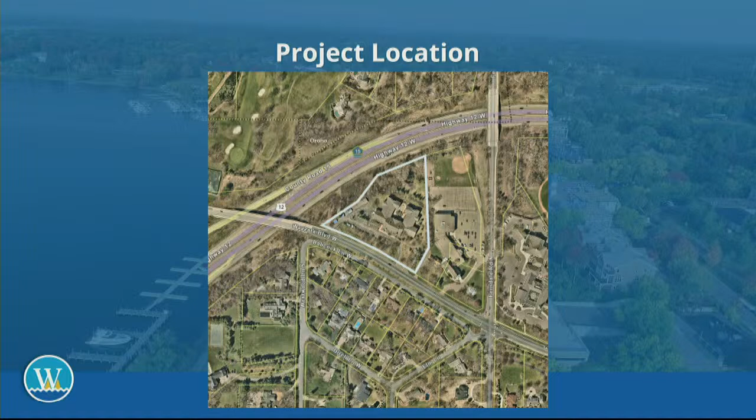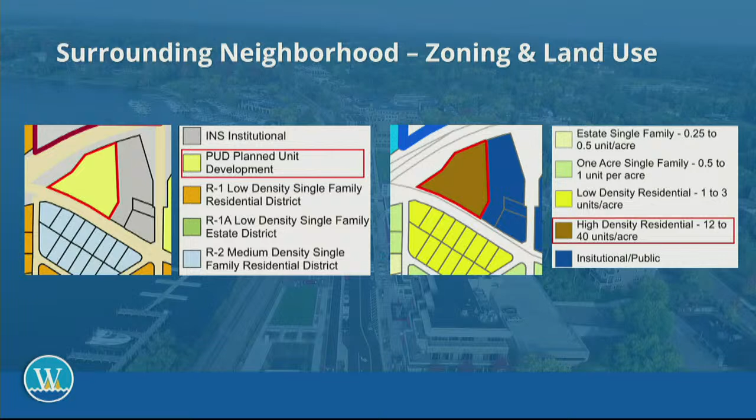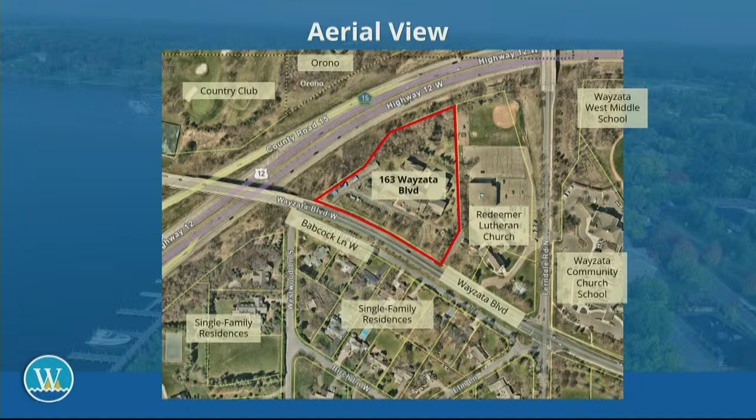Perfect, thank you. The owner of the property is TMSC of Wayzata LLC, and the applicant is Jeff Schuler, present this evening. The project is located on Wayzata Boulevard West. It is east of Highway 12 and west of Ferndale Road. The property is currently zoned planned unit development, and it is guided high-density residential. Here's an aerial view of the property. You can see that it is located near Highway 12 with the Country Club and the City of Orono located to the west, Redeemer Lutheran Church and Wayzata Community Church located to the east, as well as the middle school, and single-family residences located to the south. Here's a street view of the property looking north from Wayzata Boulevard.

There are several requests this evening that we will review. The first is the comprehensive plan amendment from high-density residential to the institutional and public land use designation. I would suggest that when we get into the discussion of this application, we begin with that request first and work through them in this order here. The next is a zoning map amendment, which is also commonly called a rezoning, from planned unit development to institutional. The third request is a conditional use permit for elderly care facility use in the institutional zoning district. The fourth is a variance to the side yard setback, which we will detail here in a moment, and then several design standard deviations, which we will also provide detail on for you this evening. I'll turn it over to Eric Swaber to describe the project in detail, and then I'll summarize at the end.

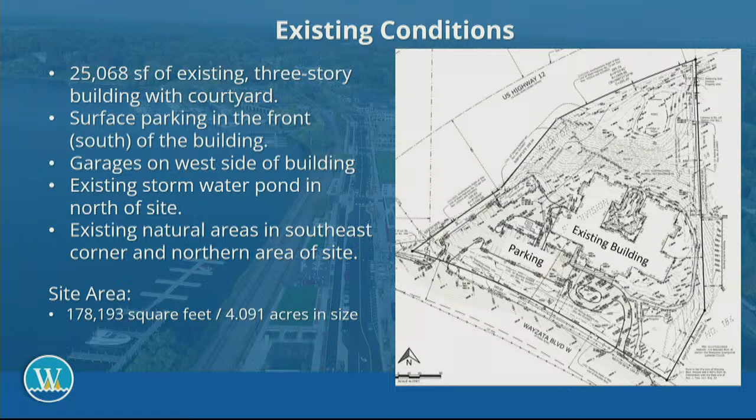Existing condition, this square footage is the footprint. There's a roughly 25,000 square foot footprint, 3-story building with a courtyard in the middle. Surface parking in the front or south of the building. Garages on the west side of the property, and the stormwater pond located on the north. Existing natural areas exist in the southeast and northern areas of the site. The site is just over 4 acres in size.

Back in 2021, this same applicant came and received an approval from the city. There were 2 elements to that approval. It was a PUD amendment to that Meridian Manor PUD that would allow the renovation of the 3-story senior living and memory care facility to allow up to 84 dwelling units. And there was the design standard deviation to allow for parking in front of the building.

Following that approval, the applicant attempted to work with the Minnesota Department of Health to get that renovation permitted, but the Department of Health, due to the changes in regulations, would not issue a building permit. So that's how we got to where we are today of the submittal for a new building. Here is the site plan. We'll go into more detail, but in general, parking in the front and in the back to the northwest, an outdoor recreation area to the northeast, and then a linear building in the middle of the site.

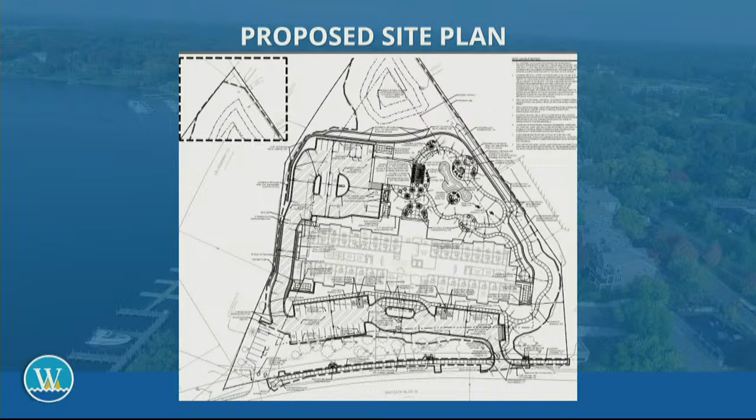This is a little bit more detail on the site plan. In brown, that is the new 2-story, roughly 31,000 square foot building. Would have 80 elderly care facility units. Has 62 parking stalls, both in the front and rear for staff and visitors. The green area indicates the patio and garden recreational area. And then the area in purple there is an accessory building that would include outdoor kitchen, a cabana, and then storage, including the trash storage containers. And that's all enclosed.

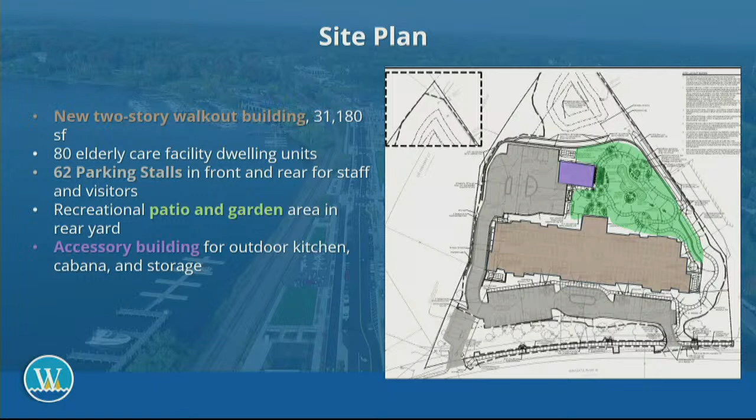Setbacks. We're trying to show through the colors which are the setbacks, but the north setback, that's the middle diagram in red with the red line, that's over 200 feet. The south setback, which is on the right-hand side, that's 85 feet. The east setback is 50 feet and the west setback is 30 feet. You will note that for the institutional zoning district, the standards for all of those yards is a 50-foot setback, so they are requesting that variance to the west side setback to be down to 30 feet.

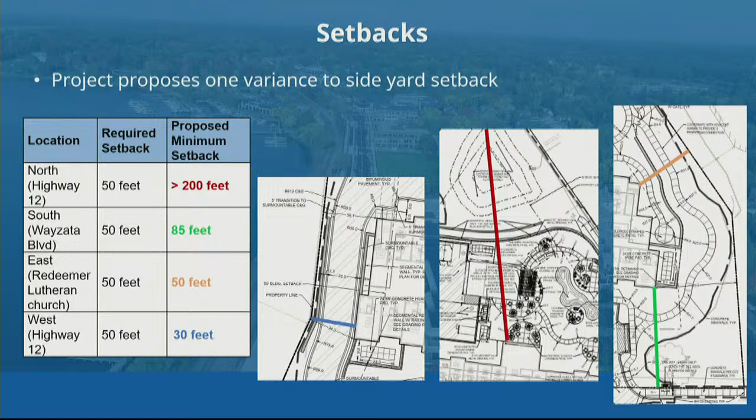Building height, the maximum heights allowed in the institutional district is 3 stories or 40 feet. So note that is different than the PUD or a number of the commercial districts that we've worked in. It is 3 stories or 40 feet. The proposed building is 2 stories and 39 feet, 11 inches.

This is again getting to the residential units and unit sizes. Meridian Manor had 75 units. Moments of Wayzata is proposing 80. The code, which again we changed back in 2022, says assisted living or memory care dwellings can have 330 square feet for units without kitchen facilities. All of their units do not have kitchen facilities, and their units range from 402 to 580 square feet in size. So they meet the requirement that we added for assisted living and memory care dwelling units.

The outdoor recreation space, one of the 4 standards for the conditional use of elderly care facilities in institutional, is that recreational space is located in the rear yard. So you see there, the northeast portion of the site is over 10,000 square feet of garden, patio, and pathways. That is secured, so you have to get there from inside the building.

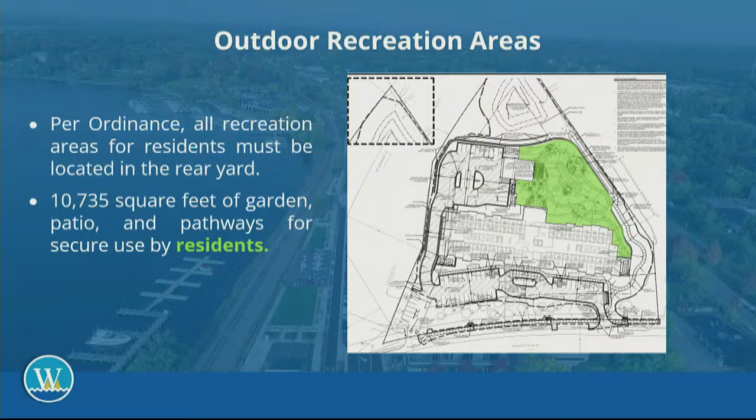The conditional use permit: they are proposing to rezone this property to institutional. Elderly care facilities, which includes assisted living and memory care, is only allowed within the city as a conditional use within the institutional zoning district. So that's the request for rezoning to institutional.

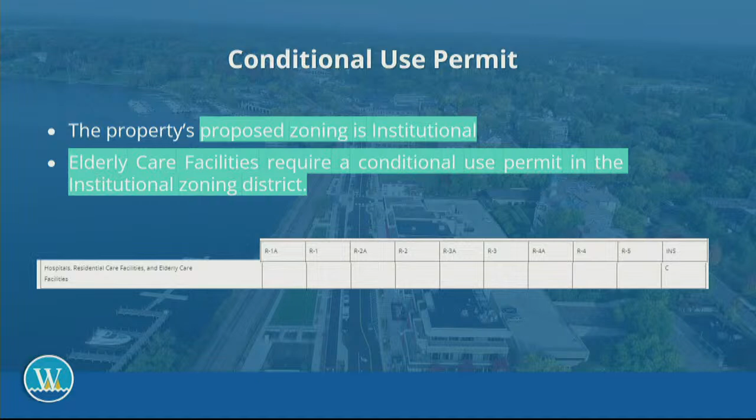The variance to the side yard setback, again, on the west side or on all sides, the code requirement for the side yard setback is 50 feet. They are proposing 30 feet on the west side. And in their narrative, they stated they're asking for that reduction because it's adjacent to Highway 12 and isn't impacting any immediate neighbors.

So going into the design standard deviations, they are requesting to allow part of their parking to be located in the front yard. Again, the CUP standards for elderly care facilities require recreational areas in the rear yard, so placing all of the parking in the rear yard would really limit that outdoor recreational area. Again, the deviation is required to allow parking in the front yard. I will note that there are actually 2 sections of the design standard that have the same requirement of prohibiting front yard parking, so it's 2 sections of the code that are being deviated from, even though they both have the same requirement.

Second design standard is building recesses. To start with, the code requires in all design standard districts that each building recess be at least 250 square feet in area and at least 8 feet in depth. So area 1 and area 4 happen to be 251 square feet in size, so they just are over that minimum recess area. And then areas 2 and 3 are about 440 square feet in area.

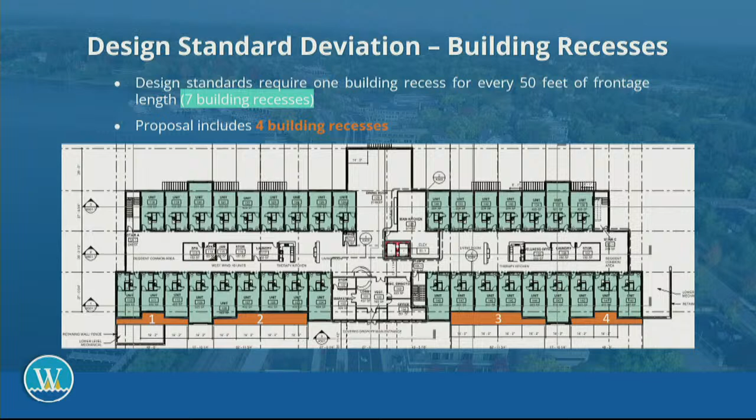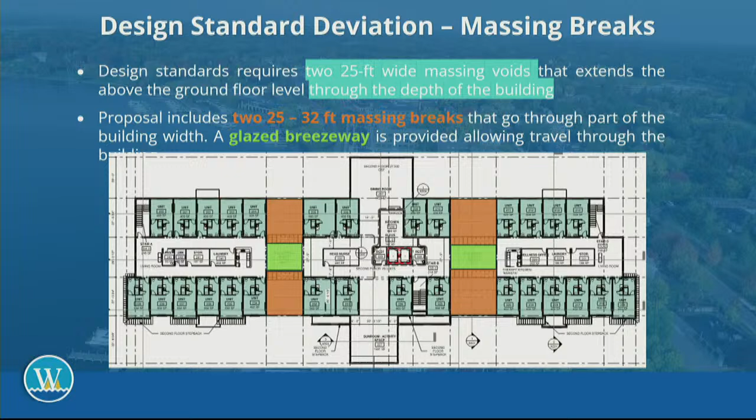The next design deviation is massing breaks. For this location, there should be a massing break that is 25 feet wide for the second story or above. So there isn't a required massing break on the first story, but for the second story and above, for every 150 feet in facade. This facade is over 300 feet, not yet 400 feet, so that would require 2 massing breaks. The way they are proposing to achieve it is they want to maintain a transparent pedestrian walkway between essentially the 3, for lack of a better word, towers of that second floor to maintain the access for the residents. The area in orange shows where there is no building, and the area in green are those glazed breezeways that are simply the hallway to connect those 3 towers.

Then there is a design deviation for unit entries. The design standard is for residential units on the ground level to have a secondary exterior entry. The proposal does not include those entries. And the reason the applicant stated is if they were included, those entries would remain permanently locked due to the safety needs of the proposed residents.

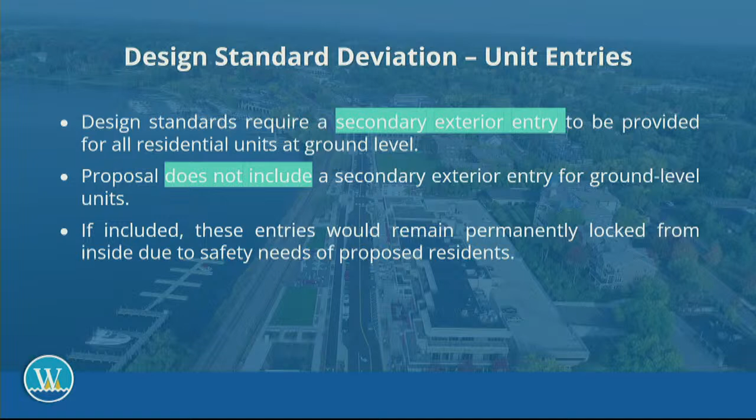The next variance is screening of sheet roofing. What this means is if you have a flat roof, the code requirement is to have a 3-foot parapet around that flat roof. They are only proposing this in one location, the location in green, basically between the numbers 8 and 9. So that's the area of the breezeway. They're trying to keep that breezeway as short as possible to keep that effect, the intent to keep the visual ability to see through those 3 separate towers of that second floor.

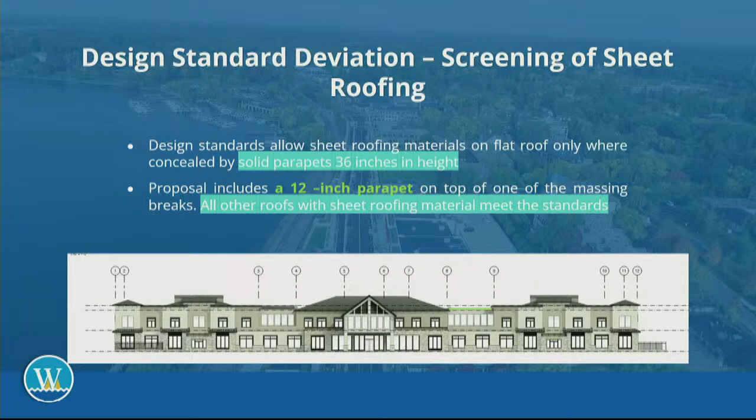So a couple other standards that we need to discuss that are code requirements are lot coverage and floor area ratio.

The maximum for institutional zoning of lot coverage is 40%. They are proposing 19.8. The comprehensive plan states that the maximum floor area ratio, that's what the FAR stands for, the maximum floor area ratio is 1, and their proposal is 0.5.

So they are proposing those retaining walls to allow for that parking area and that outdoor recreation area that is currently a steep slope. I will state, this is not in the shoreline district, so we don't need to observe bluff or steep slope regulations that we would in the shoreline district.

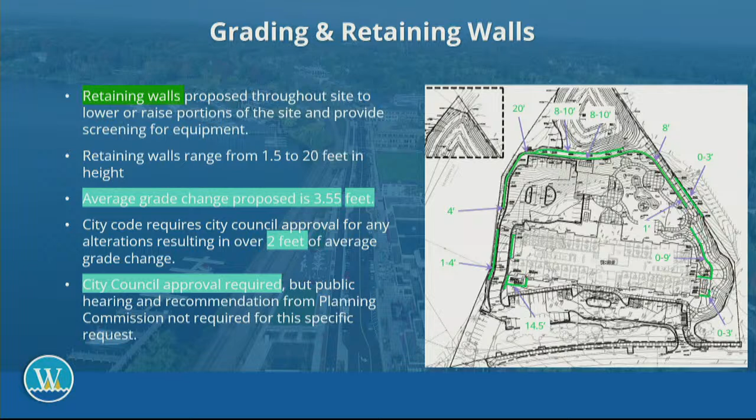Due to this and the building excavation, they are actually proposing to change the average grade 3.55 feet. The city code requires city council approval for any alteration that results in more than 2 feet of average grade change. We wanted to point that out, but state that that in the city code is for the city council, so we don't need to have a planning commission recommendation on that. More than 2 feet of average grade change.

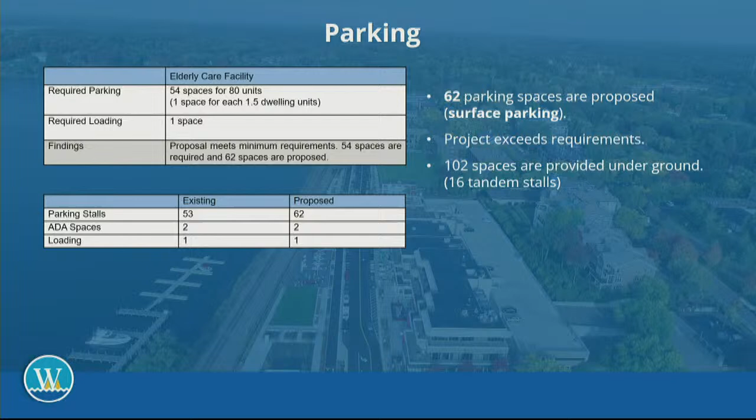So parking, the required parking would be 54 parking spaces for the 80 units. They are proposing 62. They are also providing all the ADA and loading spaces that are required as well.

Tree preservation, there is currently 774 inches of trees. DBH is diameter at breast height. We'll just call it diameter from here, but 774 diameter inches exist. They're removing 356. All the removals are significant trees. There is no heritage tree removal being proposed.

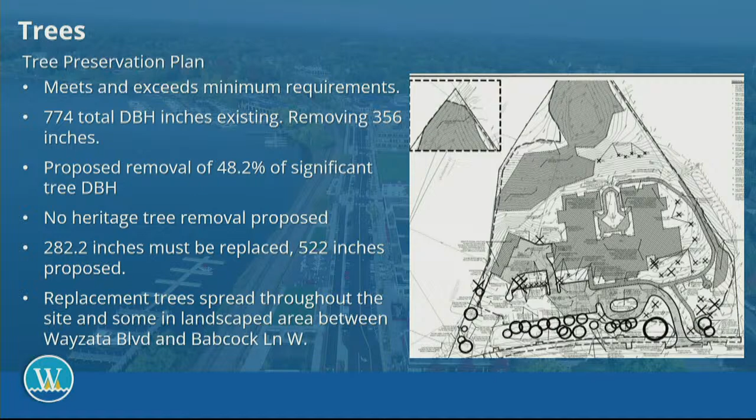And so the code standard is that 282.2 inches of replacement is required, and the applicant is proposing to install 522 inches of new trees. So not quite double, but pretty close to double the code requirement. Replacement trees will be spread throughout the site, and some are proposed in the landscaped area on the south side of Wayzata Boulevard between Wayzata Boulevard and Babcock Lane West.

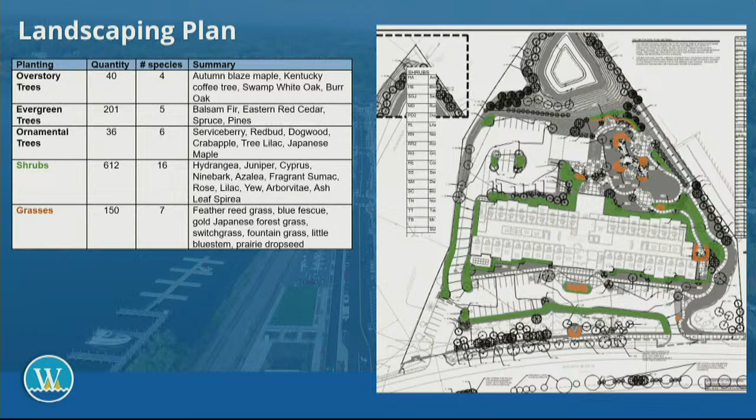There is also, in addition to the trees that we discussed, additional landscaping of shrubs, which are generally shown in green, and then some other grasses, which are shown in orange. So in addition to just the trees, they are planning an extensive landscape to the site as well. And at this point, I will turn it back over to Community Development Director Gellner.

Thank you. So notification of the comprehensive plan amendment was sent to the City of Orono and the City of Plymouth on April 2nd, 2024. We did not receive any concerns from either city. This hearing was published in the Sun Sailor on April 11th, and then a notice was sent to property owners and renters within 500 feet of the property as well.

The neighborhood meeting was on February 5th, and there were 15 people in attendance. Topics of discussion included headlight glare concerns, concerns about the east property line and improvements being made in that area in coordination with the church to the east. There was discussion of the site entry and exit points, the parking configuration, the design deviations, and the site lighting.

One letter has been received from a group of neighbors to the south. The neighbors note concerns in their letter that include tree preservation, light pollution, the architectural design, the number of design deviations, and the property condition since 2021.

Just wanted to acknowledge here that in 2023, there were property maintenance violations for this property. They were addressed by the property owner. They included long grass and weeds, storage of concrete barriers, construction trailers, storage containers, and construction equipment, as well as excessive animal waste on the property. And all those items have been addressed through a separate process from the process that we are addressing here tonight.

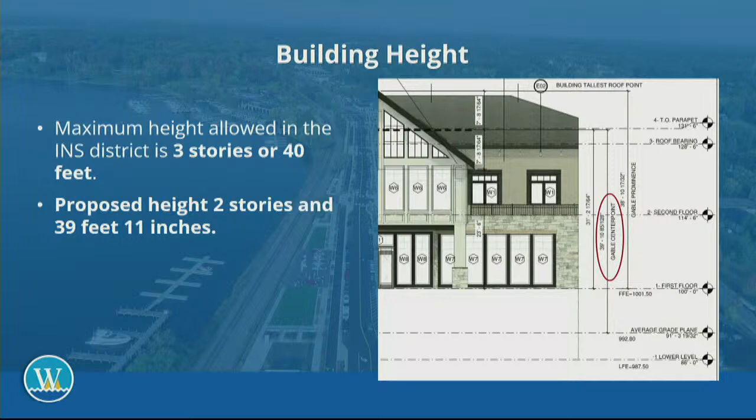Yeah, so looking at the building from the front, from Wayzata Boulevard, it looks like it's 2 stories. Yes. But then from the back, it's 3? That's correct. It's like a walkout. So the city code says that any lower level that has an exposed foundation of at least 6 feet for more than 50% of the foundation then counts as a story. Okay. This is less than 50%.

So that's why it's not a story by our code, but if you were looking from the north, which really only people from the building would, you would see the lower level and the upper level. So there's basically 3 levels in the building. There are 3 levels, but by code, only 2 stories.

Got it, okay. And maybe the applicant can speak to this, but I'm curious about the tree plan for the front of the building along both Wayzata Boulevard and Babcock Lane. Does that mean they're going to take trees across the street in that buffer between the two? They're not removing any trees. Planning on adding? They're installing trees in that buffer. Okay. And do you know where? Yes, I can tell you what page in the packet in 1 second.

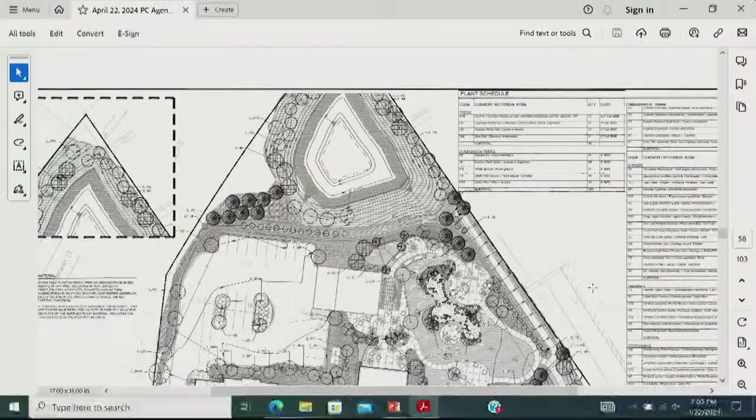It is on page 58 of the packet. The plan sheet is L 1.0, and then if we go to the very south, where you get across Wayzata Boulevard. Okay, there it is. You see there, they took a look at where the existing trees are and are proposing to install new trees essentially in those gaps. Okay, thank you. I believe you had a parking lot configuration question as well. Looks like this is answered, yes. Okay, thank you.

So Chair, I think while the applicant is doing their presentation, we can look up those grading elevation numbers. Okay, thank you. At this time, I'd like to invite the applicant to come forward and address the commission. Please state your name and address for the record and your role if you're an advisor or other part of the applicant's team. And if you can kindly keep your presentation to 10 minutes or as close as possible, that would help us stay on schedule. Thank you.

My name is Jeff Schuler. I'm the applicant, 3953 Regent Ave in Robbinsdale. I think his mic is up. I'm sorry, I'm not sure your mic is on. It should show a green light. There you go. If you could start from the beginning again.

Sure, thank you. My name is Jeff Schuler. I'm the applicant, 3953 Regent Ave in Robbinsdale. I'm functioning as the owner's rep and lead architect on the project. Elizabeth Wright, 13564 Westerness Road, Minnetonka. I am the owner of TMSC of Wayzata, in the Moments of Wayzata.

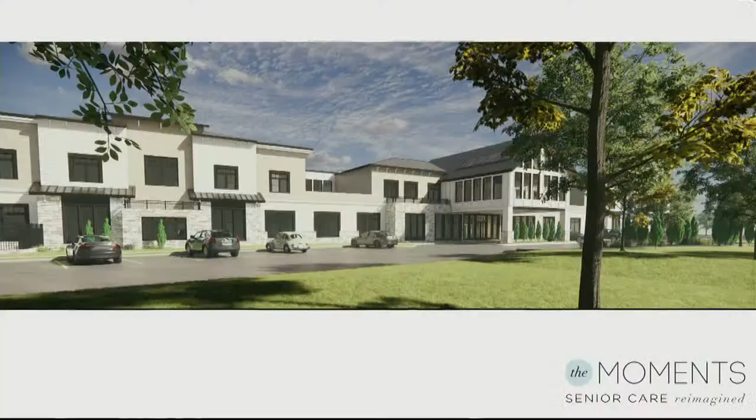So we wanted to briefly walk through. The staff did a great job on introducing the project, and so what we really wanted to touch on were the design deviations and why we think it enhances the site along with the building. So we made a big attempt. The feel of this area of town, especially communicated by the neighbors, is a residential feel, even with it being guided as high-density residential or an existing senior living. So we tried to incorporate residential parts to a building that was always going to be larger than a single-family residence, using slope roofs, different types of siding.

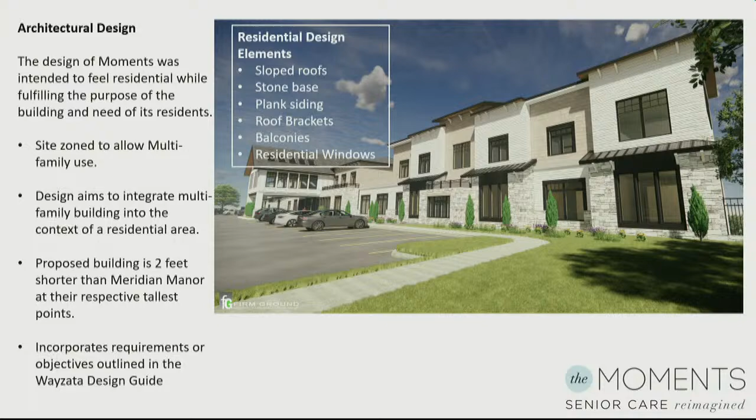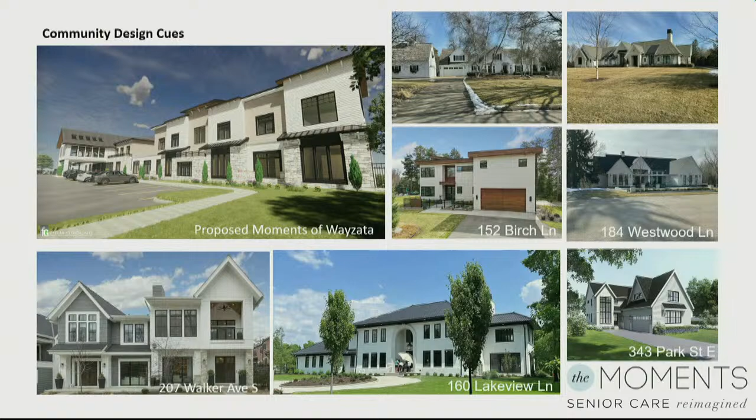I know that the tree preservation is very important to the city in general and the neighbors, and we've done our best to save as many trees as we can on the south side of the property, being that that's what the general public will still be able to enjoy. Most of these trees, with just about any redevelopment, will need to be removed just based on demolishing the building as it is, let alone the new design.

One of the things we looked at from our previous go-around with this project was the trees being a major factor for the neighbors. And so as we were laying out the site, one thing that we talked about internally is that by moving all of the parking to the back of the building, in order to get enough space for both the required amount of parking stalls and the recreation area, we would need to pull the building as far forward as the setbacks would allow.

And being that we have a deeper building going down 14 feet from grade at the south side, the excavation of that building would end up impacting many more trees, rather than leaving the parking that's already in that location as a buffer between the construction to save and protect those trees along the southern border.

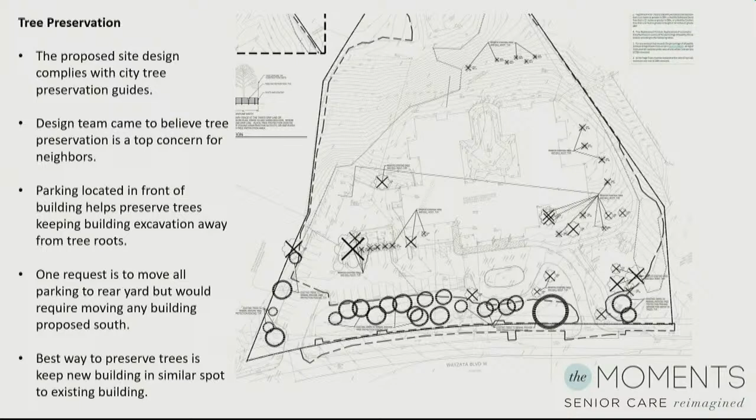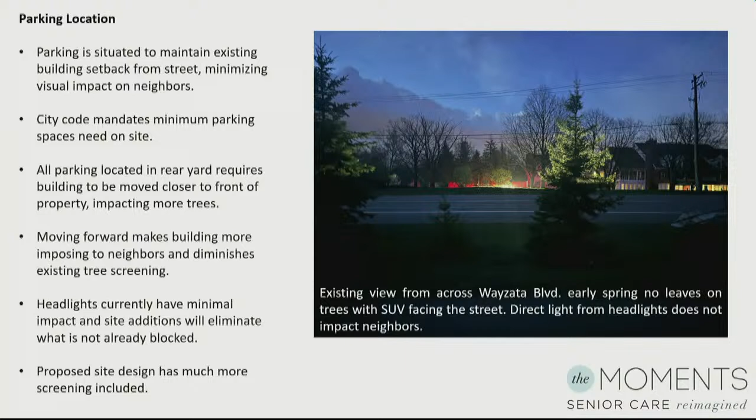We also laid out that parking so that we have enough parking for all of the staff at the non-peak times to park in the back. So all the movement and activity on this site by cars, the majority of it will be behind the building. None of the residents own cars, so there'll be fewer cars, and all of the visiting cars going in and out are really not there after 8 or 9, maybe 10. And so these lights, really, we don't think will have a major impact on the neighbors.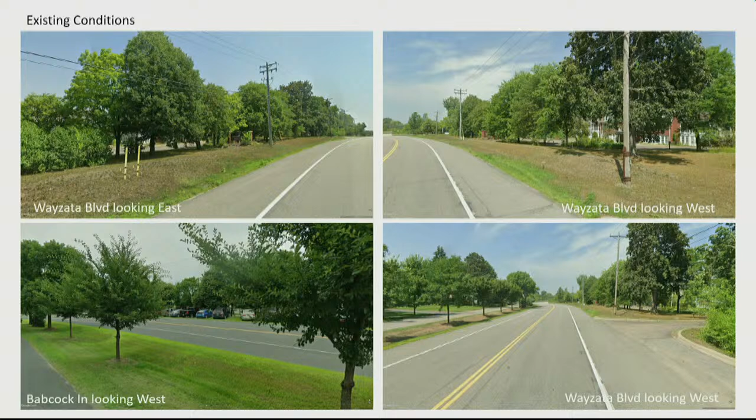This is looking at the existing screening and trees. There's quite a bit in the summer, once all the leaves are on the trees, where it is difficult to see the building as it is. And it will continue to be so because all of those trees along Wayzata Boulevard will be saved and preserved.

This is talking about the building recesses. The goal, as I understand it, is to make sure that the city of Wayzata doesn't end up with a large monolithic building. And I think that's a hard goal to quantify in codes. And so my interpretation is that with the amount of recesses, there's an attempt to quantify something that's a little more subjective. And so what we've done is try to meet the intent of that by breaking up the building, not letting it be just straight walls.

We also have something that the code doesn't allow for inclusion in this, but it's the porte cochere on the front. From grade, that looks like a flat plane, but as you can see in elevation and in 3D, that porte cochere comes out and helps break up that design even more, even though it's not able to be quantified in the code.

Oh, sorry. So you can click a couple times. It'll go through and just highlight all the different areas. Those two are the recesses that meet the code guideline. There's going to be quite a few clicks here, Emily, if you want to just keep moving.

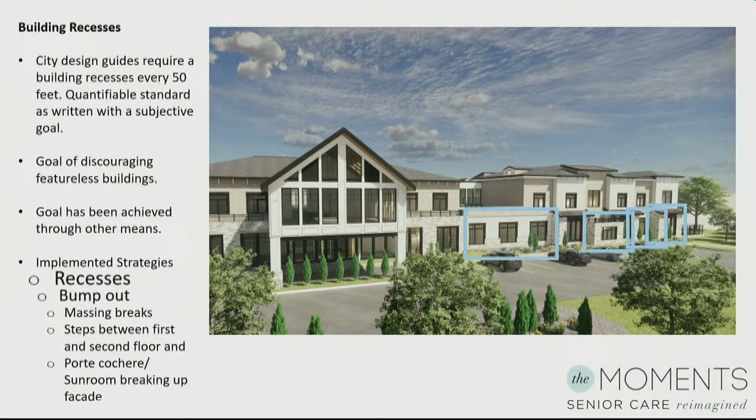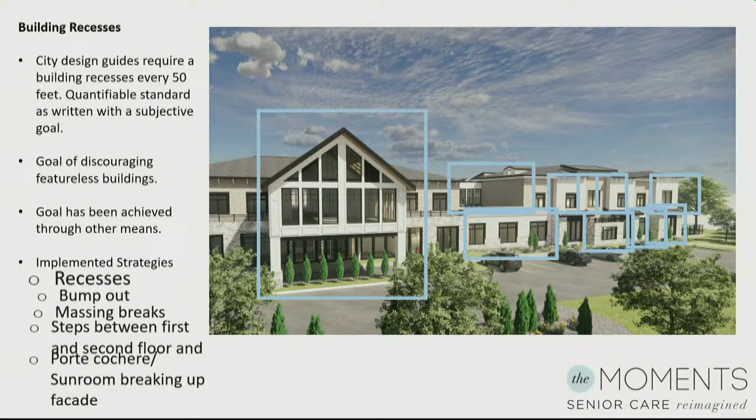We have bump outs coming out to break it up. The building in multiple places on this elevation steps back to help break that up. We have the massing breaks that we'll talk more about here in a couple minutes, where the building is broken up. And then, like I said, that porte cochere that is not necessarily quantified in the code for the recesses, but it does have an impact.

And then the last big impact design deviation that we're looking for is with the massing breaks. We understand why this is in the code, to try to break up so we don't end up with, once again, a monolithic building. But that does put quite a heavy burden on staff and residents of a facility that have a hard time navigating their home in general, let alone if residents were sequestered in individual towers of this building. They're not capable of using elevators on their own, so any movement to get down to eat in the morning, to the salon, to any of their activities would then need to be guided by a nurse and have quite a large staffing contingent just for the movement across what will end up being 3 towers.

We took guidance here from the Wells Fargo property that was recently approved. They did almost the exact same thing with a transparent walkway to help bridge those towers and achieve the massing breaks while still being accessible to residents on those floors.

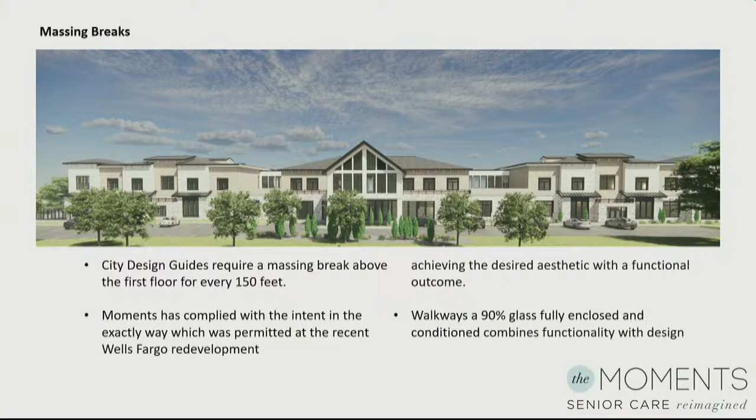And then I believe this will be the final one. The individual exterior unit doors. In a community like this, all of those doors, like we said earlier, would be locked. Not only would they be locked, but they would be a big distraction and hazard to residents who can't remember that door doesn't work and won't work. So they'll end up being quite frustrated by a locked door in their living room.

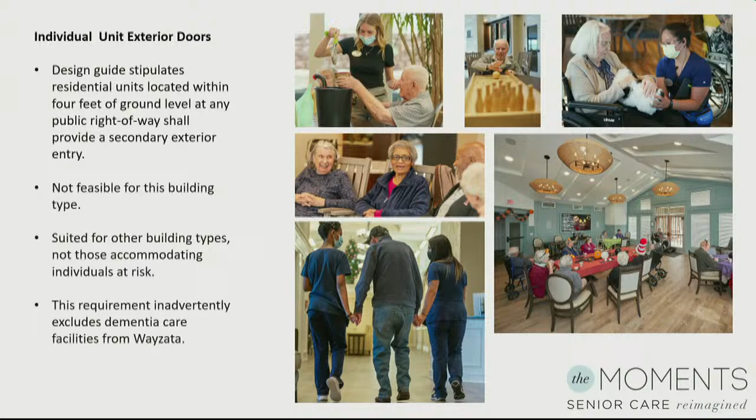And I don't believe that in this area, which is not quite as walkable as the rest of Wayzata, a door facing the public way in each of these units adds to the exterior character, and I know it has a large detrimental effect on residents who would live here.

Oh, and then finally, the parapet height. In this area of Wayzata, we're not allowed to have any rooftop equipment, and there's none provided. So there's nothing for the 3-foot parapet to screen necessarily, especially since, unless the church is demolished and replaced, there'll be no neighbor who will be tall enough to see the roof of this building.

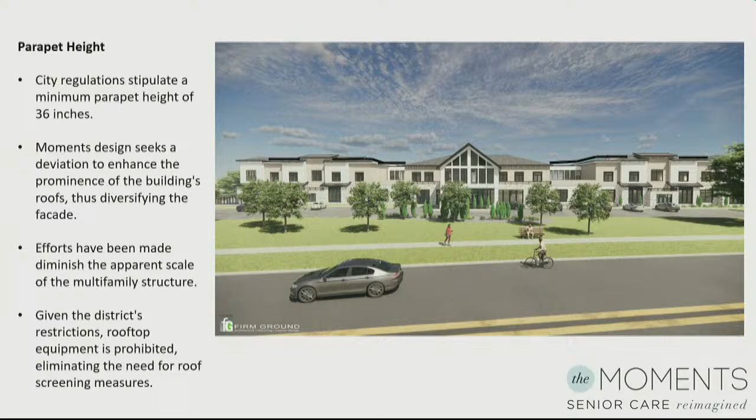I think, yeah, that's just our closing slide. Thank you. Would you like us to stay up here or sit?

The only ones in the southwest corner of the lot seem to be facing Wayzata Boulevard, or what's already there. Correct. Okay. And we're going to get the grade on that, but I also have a large SUV and I kind of tested it out, but I'd be interested in hearing the grade changes there. So the new then faces the building, the headlights will face the building on the southeast side? Yes. Any additional parking in the front of the building, as far as stalls, face the building.

Okay, thank you. So this image you have here shows the front looking very sort of flat and level, but in actual build, it would be sloped, right? Because that's... Yes, this rendering is prepared by the architect, really highlighting the building, not necessarily the lot. Okay. Yeah, just clarifying, thank you.

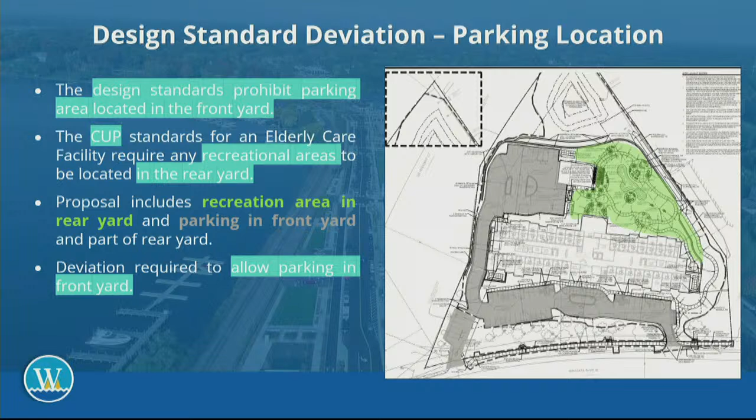If I could, it was one of the questions you asked the applicant, but again, ignoring the west parking that faces Highway 12, there are currently 31 stalls in front of the building. There's proposed to be 35. So there's 4 more proposed in front of the building. Okay, thank you. Thank you for that clarification. It's very helpful.

I think now we can turn to the public hearing if there's no more questions to follow up with. Yeah? Okay, great. So the public hearing is a time for us to listen to you, our community, about the approval requests we're considering this evening, and it's an important part of the process that allows the public to participate. Questions asked during the public hearing will be held until the end of the hearing and may be addressed by staff at that point. Our goal is to make a well-informed and grounded recommendation to the City Council about this application and this applicant's request.

If you are not comfortable speaking tonight for any reason or have more comments after, this is not the only time you can submit your comments. You can also submit them to the city prior to the City Council's consideration of the application and also attend that meeting. With that said, I'm now going to open the public hearing. I'm going to try to get the title of the application somewhere in my notes. The public hearing for consideration of the development application for comprehensive plan amendment, zoning map amendment, conditional use permit, variance to the west side yard setback, and design deviations for an elderly care facility, Moments of Wayzata, at 163 Wayzata Boulevard West.

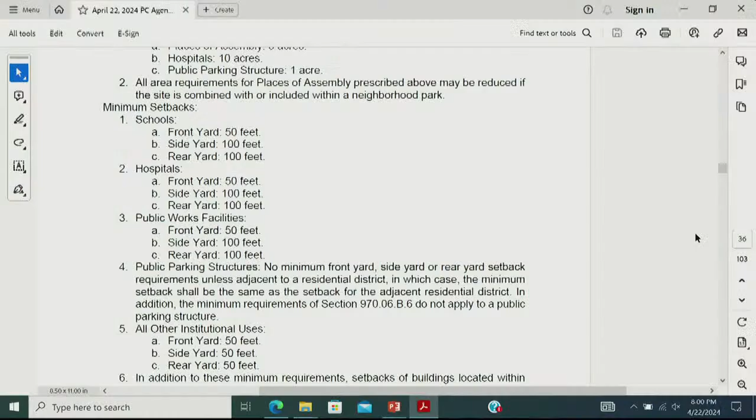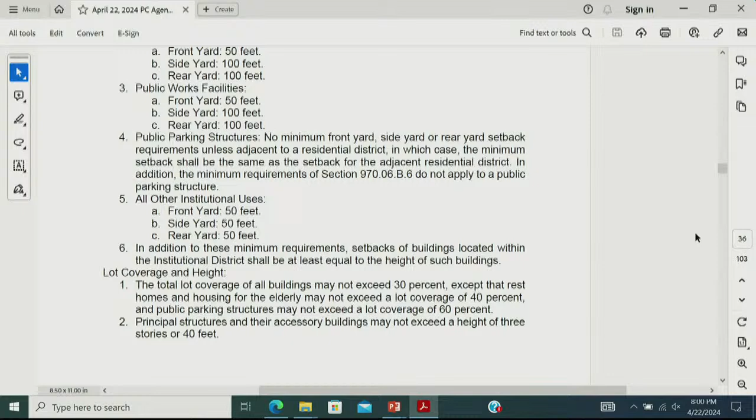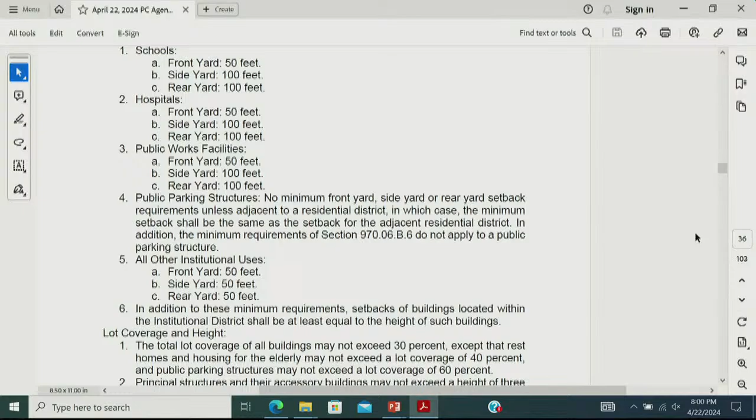So Chair, I can just note that staff has analyzed this information and found that it generally meets performance standards with the exception, of course, of the variance that's being requested. So we don't need a parking variance. All other performance standards are met besides the variance in the west side yard. So really, we could consider that as you discuss that specifically. But if you feel that's completely linked to this zoning map amendment, we can discuss that with Attorney Schulzel if you have any questions.

Chair, I just wanted to point out that the list of standards when you consider rezoning is on page 35, at least in my PDF. Yeah. I think staff's highlighting a couple of those performance standards, which is very important, of course, and their analysis plays into that. But you're really charged with thinking about the possible adverse effects of that rezoning. And there's seven criteria there for you to look at.

Present and future land uses. Well, I mean, we talked a bit about the parking, right? And we had approved the previous proposal with the parking in the front, and we've discussed the level of the parking. So I feel like we've kind of, and also the functionality, which I think was really important, that this proposal, unlike the last one, really moves the garbage. That was a big hang-up in the past.

And, you know, it makes a lot of sense why there was a lot of thought about the rubbish and the noise associated with it, but now that's kind of in the back of the building, which is a nice change, and I think a positive. And the front parking is used more for your visitors, and as well, the applicant did state that the staff would be directed to park in the back where there was room, so all those things make me feel more comfortable about the parking aspect.

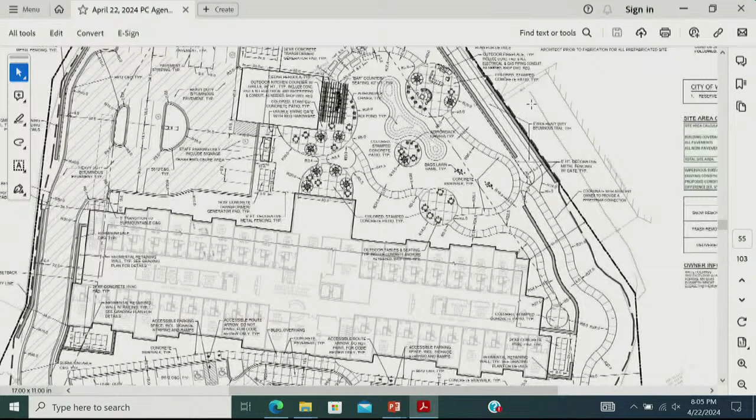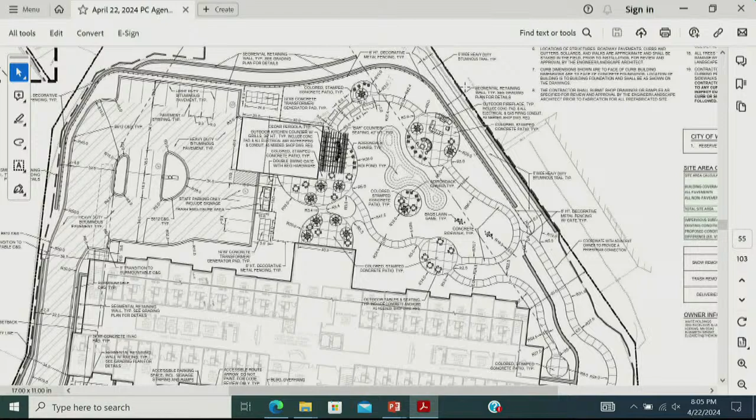So as you move north, you see the retaining wall and then the fence basically on top of the retaining wall. And then you see a fence with a gate where that sidewalk hits that back recreation area, and then again, a fence going over to the retaining walls. So between retaining walls and fence, it is secure. Okay, great, thank you. Any discussion? Anyone have any thoughts on this particular area? Well, I'm satisfied with that, and I'm sure that the state licensing requirements will determine how they do all of this, far beyond what we might expect. But, yeah.

Yes, Commissioner. Yeah, it appears that they're in compliance on the last issue with this being a controlled, screened-in area. If that's the case, other criteria include, again, the present and future land uses of the site and applicable performance standards. So those are the primary issues. This variance for the conditional use permit, I think, would be appropriate. Yeah, I'm not seeing anything that's jumping at me, so we can potentially move on to item number 4 of our discussion. And there's a list of items we're looking at here.

The first is the property owner's proposal reasonable but not permitted by the ordinance? The second is the plight of the landowner due to circumstances unique to the property? And this is with regards to variances. Will the variances granted alter the essential character of the locality? And has the applicant established a practical difficulty in complying with the ordinance? Finally, is the proposal in harmony with the general purposes and intent of the ordinance and consistent with the comprehensive plan? And this is the variance that affects our west side, right? Correct. Yeah.

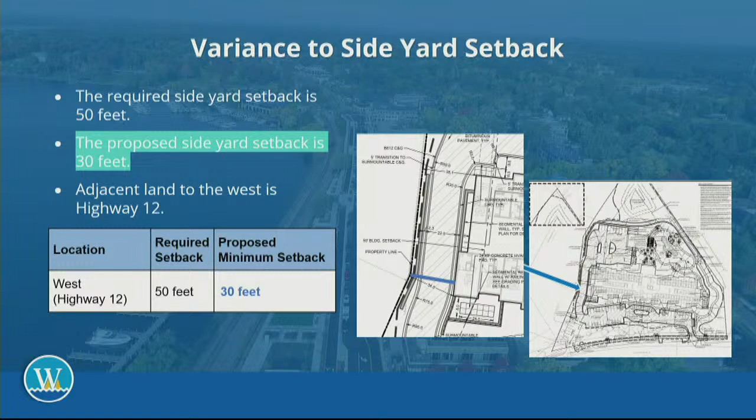But when you look at what they stated, when you look at the floor plan, that middle hallway is the common areas for the residents, and making that change really breaks up that common area for the residents. Sorry, making what change? So this is 180 degrees. If they would have made it curve, like 120 degrees, that essentially shrinks the whole length. But doing that breaks one long common area into two, because the residents on one side aren't going to know that there's something for them on the other side.

I respect you said that, but what's the difference? Does it make that much of a difference if you take 20 feet off of a 355-foot-wide building? Maybe it's to be made up in other ways in the design deviations. Potentially, yeah. I don't know how.

Commissioner Sorensen? Yeah, when I initially saw this, I wasn't too concerned about it because of what's there, up against the highway and the golf course. But I do think, as we talk about the other variance issues, this may become a little more clear. Do we really think this is a good idea or not? Because I think the long linear nature of this building is what's causing some of the issues that were brought up by the community and that we also have.

So maybe it'll gel a little bit better once we talk about the design deviations. I agree. I think it sounds like we need to move on to the design deviations and really hash those out and understand what we are seeing there before we can think further about the variance.

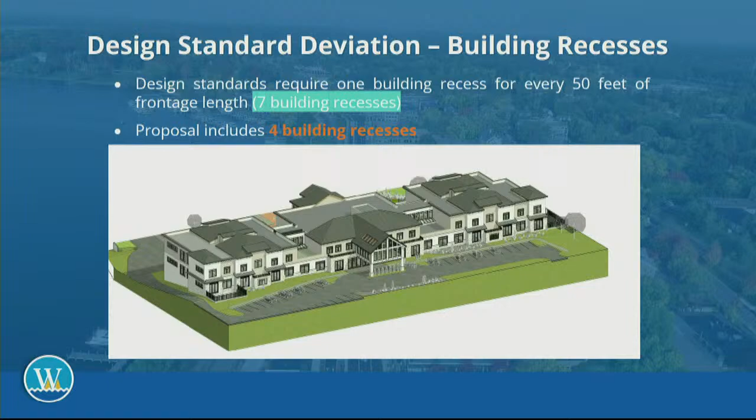So I'm going from seeing a lot of green space and a lot of blank space to now having the whole front of that property, I know the whole property isn't full, but that's what I'm having a problem with. It's a lot. And I think it needs to be more subtle. For me, I think it's probably a combination of the structure itself, the length and the tone, and the harder edges that collectively create a lot of impact that feels less residential, even though it's residential for a certain group of people.

Without getting into the architecture and design, and just looking at the deviation that's requested, the massing breaks, I understand how difficult that is with wanting this walkway connection for the residents. It wouldn't be viable to have a lot of separate buildings. However, the intent of massing breaks is to eliminate monolithic buildings, and I just don't see enough of that here. I'm glad that we're in agreement with not requiring that 3-foot parapet all around, because that allows us to get a little bit of variance in the roof. We see that in residential buildings, and I think that's very helpful for a project like this.

Deviations are appropriate when the purpose and intent of the design guidelines are achieved, but I just don't feel the purpose and intent of massing breaks is being achieved with this deviation request. And in the applicant's summary, even they said adding more recesses to the building wouldn't change this: adding 3 additional recesses would not further enhance the character of the building beyond what's been proposed.

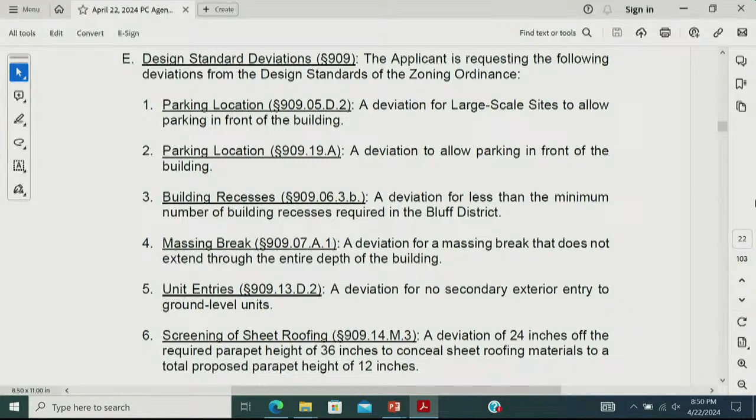Okay, so of the deviations, I heard support for number 1, 2, 4, 5, and 6. Correct. And denial of number 3. From the other requests, there was support for the comprehensive plan amendment, the zoning map amendment, the side yard setback variance, and then numbers 1, 2, 4, 5, and 6. So I have a question. If that's the motion made, and I'm not in favor of the building recesses and the side yard variance, how do I vote? Chair and Commissioner, I would recommend you vote no. You wouldn't be in favor of everything in the motion. So the motion is going to be all one instead of individual. That's my recommendation on procedure, yeah.

And some of the comments, be them subjective or otherwise, are included, right? All of the comments, Chair, should be, in substance, included in the minutes. And I would encourage, when we bring back the draft report, that you look at it carefully and also look at the meeting minutes to make sure your concerns are expressed accurately for council when they consider the application.

Okay, so I think then we're ready to make a motion, but we need that language, which is going to be long, I think. I'm happy to repeat it again. Okay, that'd be great. What I heard was recommendation of approval for a comprehensive plan amendment, a zoning map amendment, a variance for side yard setback, and deviations from the design standards for parking location, massing break, unit entries, and screening of sheet roofing, and the recommendation of denial of the building recesses design deviation. And Chair, just to supplement that, I think the motion would be to direct staff to prepare a draft report and recommendation with supporting findings on each of the requests in the application that were just articulated by our director. Okay. Does a commissioner want to make that motion this evening?